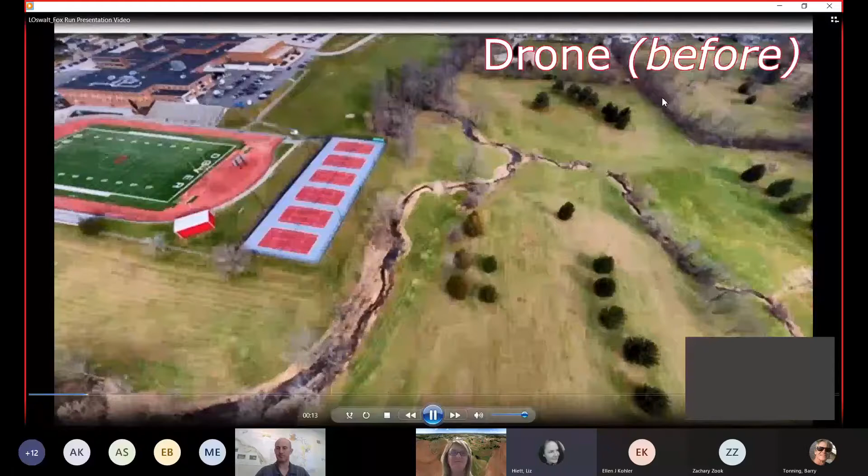The Fox Run floodplain restoration sits at the heart of Dover Township's new Eagle View Park and delivers a host of regional benefits. Floodplain restoration is a multifunctional best management practice that can provide stormwater management for proposed development, pollutant load reductions for MS4 obligations, flood mitigation, educational and recreational opportunities, and extensive ecological uplift.

The property, a former golf course, was purchased by the township in 2011 with visions for a future park. The two tributaries to Fox Run flowing through the property were identified as a potential restoration project in York County's Regional Pollutant Reduction Plan in 2017 because of the severely degraded condition.

Understanding the community's goal for a future park, Dover contracted Land Studies in 2017 to conduct a feasibility study and assess the potential to achieve both pollutant load reductions and meet stormwater needs for the park through a single floodplain restoration project. Land Studies ultimately provided design, permitting, grant writing, and construction management services to achieve regulatory authorization, secure funding, and construct the restoration, which was completed in October 2020.

The restoration resulted in the removal of 27,000 cubic yards of legacy sediments from the floodplain to restore the historical ecological function and capitalize on the associated benefits. The restoration provides sediment load reductions of 154,387 pounds per year by eliminating problematic erosion and encouraging beneficial ecological processes.

The project also meets stormwater peak rate and volume requirements associated with up to 10 acres of impervious development associated with Eagle View Park, and was also demonstrated to replace the function of an existing regional basin on the adjacent parcel, which will now be removed to accommodate a future road extension and associated economic development.

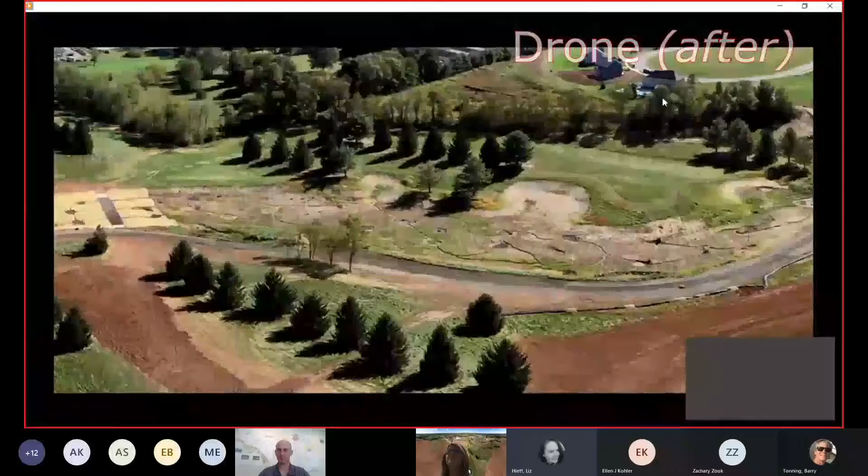Utilizing a single best management practice to serve multiple purposes helped the township to save money compared to traditional best management practices. And leveraging the extensive benefits to attract diverse funding sources helped to truly minimize costs to the township. Dover was awarded $1.49 million from DEP's Growing Greener for floodplain construction. The York County Stormwater Consortium contributed $605,000 to relocate an existing sewer line to accommodate the improvements.

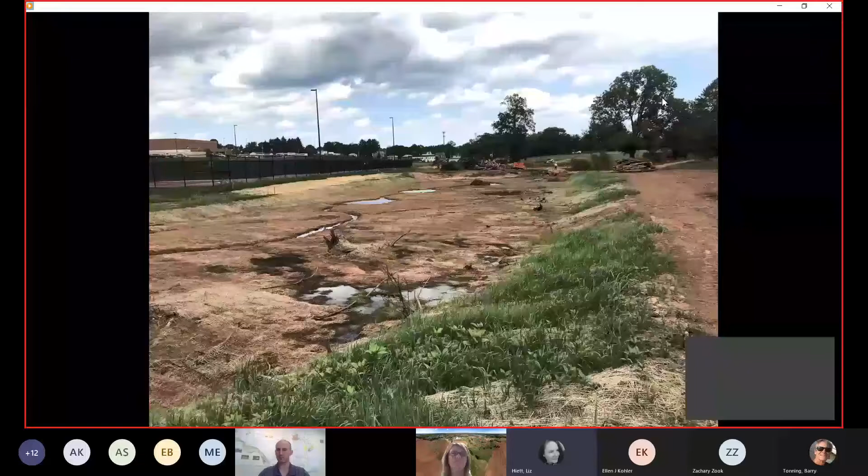And just recently, the township received $250,000 to fund the first phase of park improvements. The floodplain restoration was completed in fall of 2020, and park improvements are scheduled to commence in summer 2021. Dover's long-term planning and regional outlook were critical to achieving these successes, and those are the keys to applying these same concepts in any community.

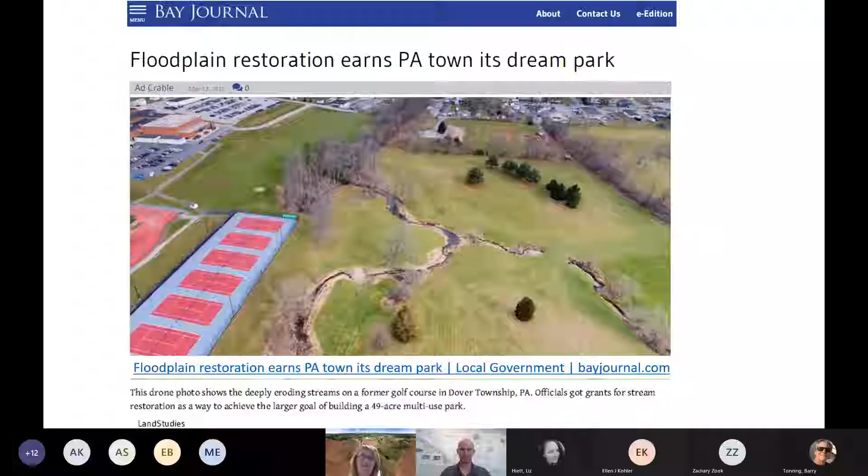In 2011, the township purchased the Mid-Atlantic Golf Course to provide for future open space and expansion of the municipal complex. However, after this purchase began, we began to see a slowdown in residential development, as well as a change in our elected official makeup. From 2011 to 2016, the entire 5-member board of supervisors changed. The staff needed to build relationships with the newly elected officials to explain the operational needs of the community and its personnel as we continue to grow in population. Fortunately, during that time, development also began to pick back up, and projects unlikely to be funded by grants became more palatable.

In 2016, the York County Regional Stormwater Consortium, made up of about 40 municipalities, was looking for projects to meet the new pollution reduction program requirements of the regional municipal separate storm sewer system permit. From 2018 to 2023, the permit will require projects to be funded to meet these pollution reduction goals. Dover Township, due to the funding model adopted by the consortium, would pay $202,000 per year to fund these projects, which equates to about $1 million over a 5-year permit cycle. The Fox Run floodplain restoration project would allow the township to see a return of those monies to the community by funding a much needed project.

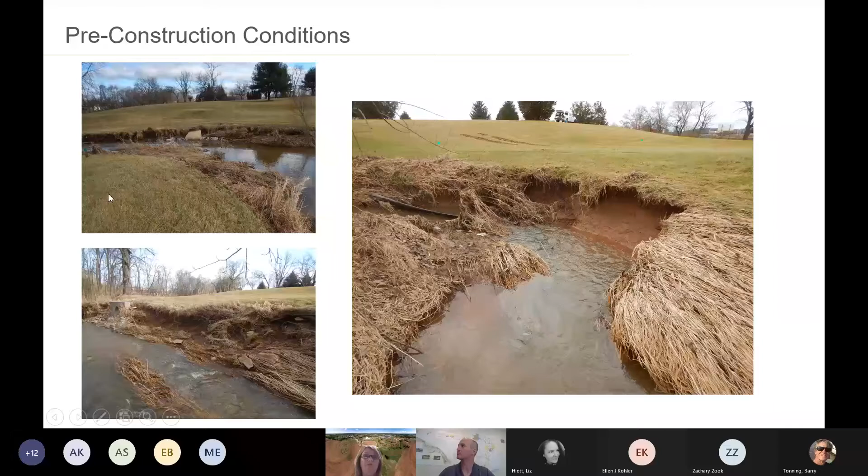Our project kicked off with the construction beginning in May of 2020 and finishing the earthwork in late September. Planting and seeding continued in the fall. Considering the circumstances that we all faced in 2020, this project was a pleasant surprise for how well the contractor and consultant were able to meet the timelines and complete the work within budget. Next slide.

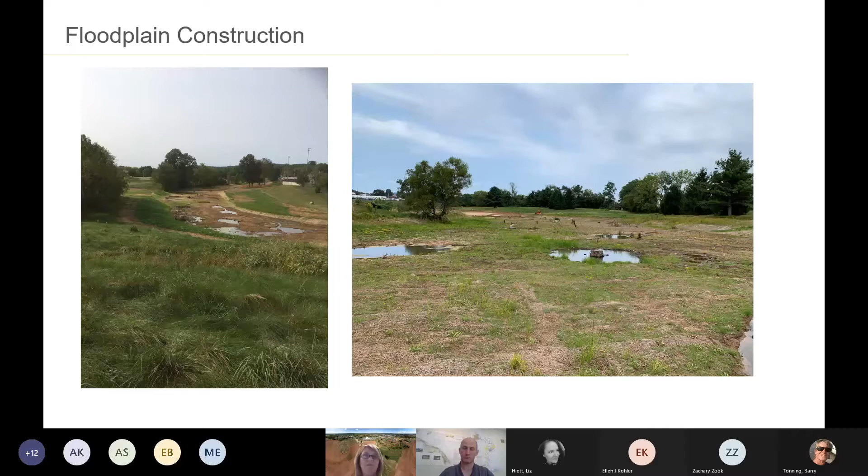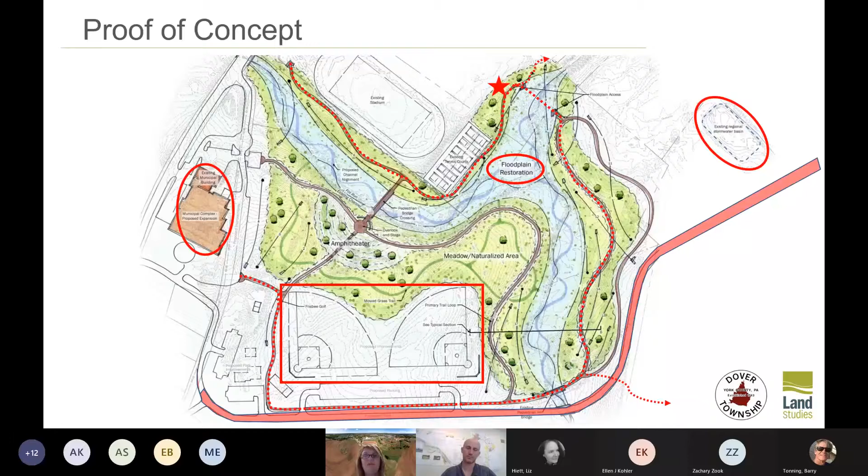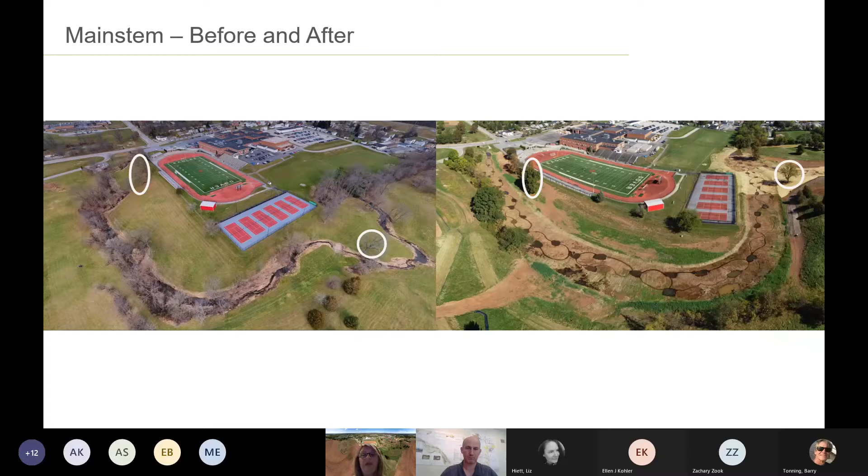The commitment of that $185,000 for design and permits and to the design build process made us successful at obtaining the Growing Greener grant for the floodplain restoration, and it was the catalyst for all other funding. Thus far, Dover Township has leveraged the $1.49 million in DEP money to obtain $250,000 in DCNR money for phase 1 park improvements consisting of trail installation, an outdoor classroom, disc golf, educational signage, and a pavilion with a fireplace.

The $605,000 from the York County Stormwater Consortium to relocate our sewer main out of the historic floodplain footprint was also received. And just recently, we received word that we are receiving a $200,000 grant from the Pennsylvania Department of Community and Economic Development from their Greenways Trails and Recreation program to fund additional trails and the pedestrian bridges. We have recently submitted for another $250,000 DCNR grant for our adult baseball field, trails, and parking facilities.

Wait, go back a minute there. On the slide on your right, between the 2 trees, that is where the pedestrian bridges will connect the school and the township's park, and there will also be educational opportunities for the students in that area for them to do their stream studies, which they've historically been doing for years, but this is going to be a much better way for them to do that work.

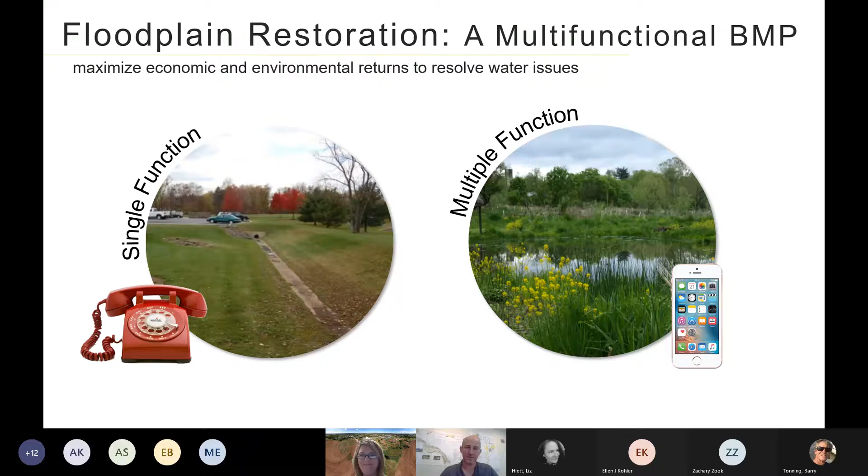Thanks, Laurel. Messing with my mouse here, going a little slowly with the wheel, so excuse me if the slides jump around.

But that was a big picture summary of Dover's journey. Initially they acquired this property with thoughts of maybe it's a future park. They had some hesitancy from the board of what we're going to do with it, and eventually the stream on the site was identified for a PRP project, which through our feasibility study we identified, yes, you're able to achieve substantial pollutant load reductions from this floodplain restoration BMP. And that's the primary driver of this project, the initial driver for the township, and kind of everyone's goal here today. How do we meet our MS4 requirements? What's the best way to go about getting these pollutant load reductions we need for our PRP?

And there's no magic bullet, but I will say that the floodplain restoration BMP is capable of achieving substantial load reductions, which we'll get into later. And as you can see from Laurel's talk, there are a host of secondary benefits that it can provide for a community. So it makes sense in a lot of cases, but it all starts with looking at the big picture and seeing what your community needs are, not just in terms of how many pounds do we need to reduce of sediment, suspended solids, but we have this requirement we need to meet, and how can we make that work within the other goals and the growth of our community, I think is the biggest takeaway.

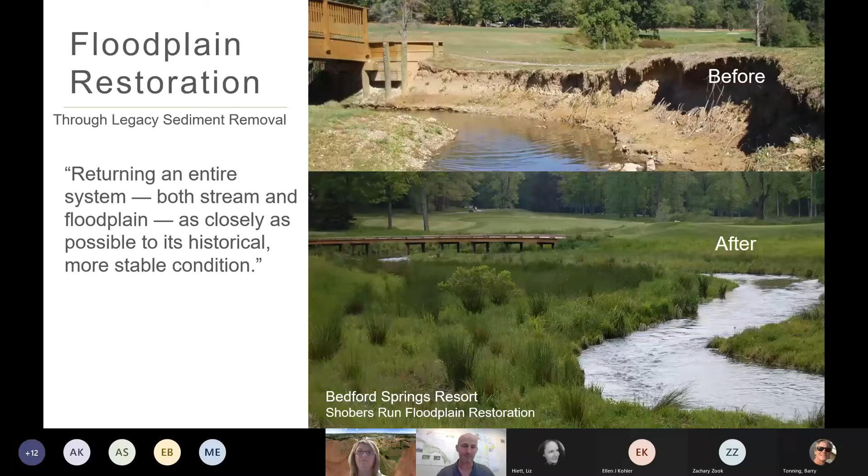And what legacy sediments are: fine sediments that were mobilized from historic intensive land uses and ended up in our valleys, that clogged our waterways that used to be these vast, wide floodplains with small anabranching channels connecting these big wetland complexes, where there wasn't any clearly defined entrenched channel, but instead a big wetland stream floodplain complex where in storm events, any sort of rainfall event, that floodplain would be full and mitigating stormwater flows and reducing energy and allowing pollutants to fall out on the site. And that's historically how our floodplains functioned up until some of our impacts from settlement.

So to understand the story of legacy sediments, you have to understand the story of the region and of Pennsylvania in particular. So when the state was first colonized, almost immediately land clearing through slash and burn timbering started and occurred across the state. The whole state was cleared of its trees, and they were an economic resource. The wood from Pennsylvania helped build the country. And it was also a way to clear land for agricultural pursuits.

So in Pennsylvania, we have a really storied history of using our natural resources as best possible and as efficiently possible to get the most value out of them when they're valuable. And 300 years ago, this was harvesting our timber and turning that land into valuable agriculture. But what this resulted in is this mass mobilization of upland sediments and fine material. So you don't have vegetation slowing runoff, so you have increased runoff events, and all this material is mobilizing from the hill slopes down into our valleys.

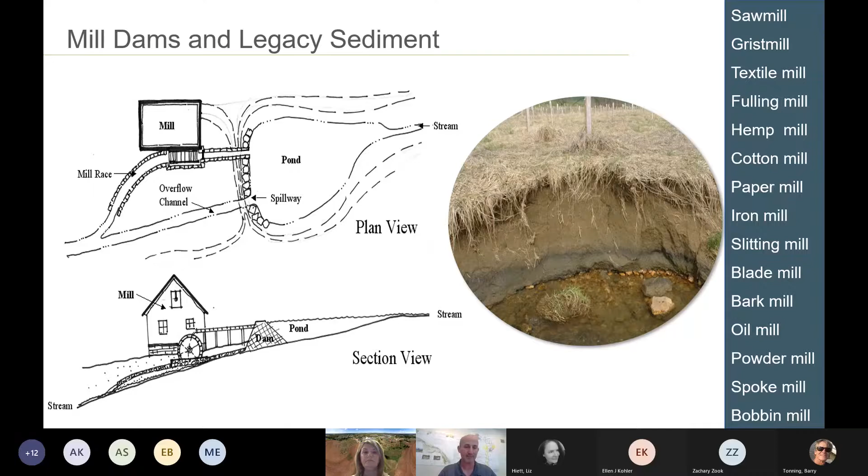So since the start of the Holocene, since the end of the last ice age, essentially, that thin organic layer was stable enough and sufficient enough to accommodate any flood flows that would have occurred without aggrading or degrading past that 6 to 8 inch layer. And then research that's come out of F&M, Dr. Walter and Merritts have been real pioneers in the study of legacy sediments within the region, have done carbon dating that'll show this organic layer can be anywhere from 400 to 6,000 years old, say. And if you do a carbon dating profile of that legacy sediment material, it's all deposited within the last 300 years or so, since whenever a dam was constructed in that area. And what happens with these dams is, when you think of a mill dam, you think of something massive and structural.

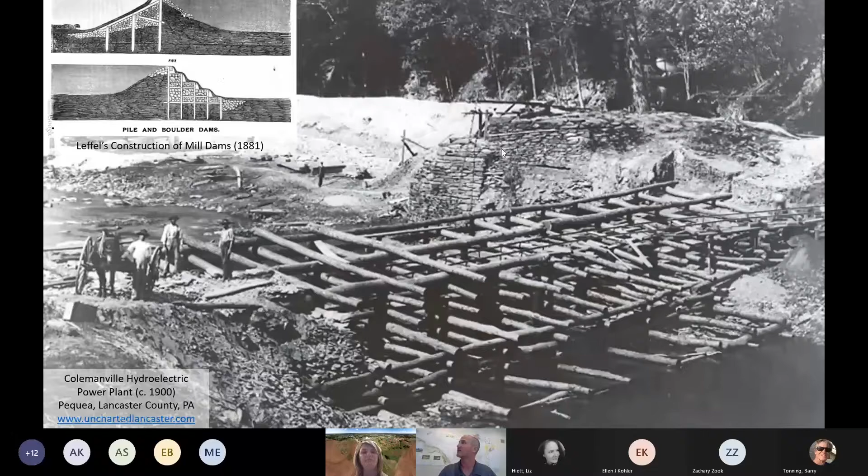And this is an extreme example. That was for a hydroelectric dam actually built in the 1900s that failed 26 years later. And you can see the remnant legacy sediments after just that short time. But it wasn't always a massive structure. It wasn't just milling operations turning a water wheel. It was watering operations for agriculture and livestock.

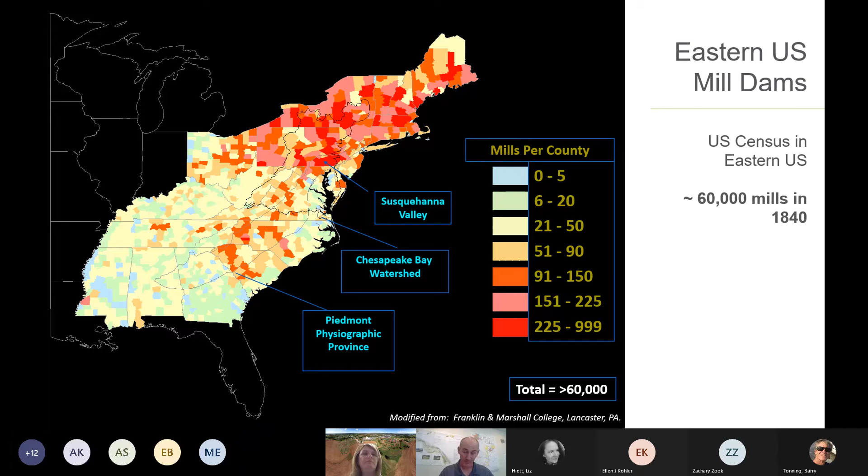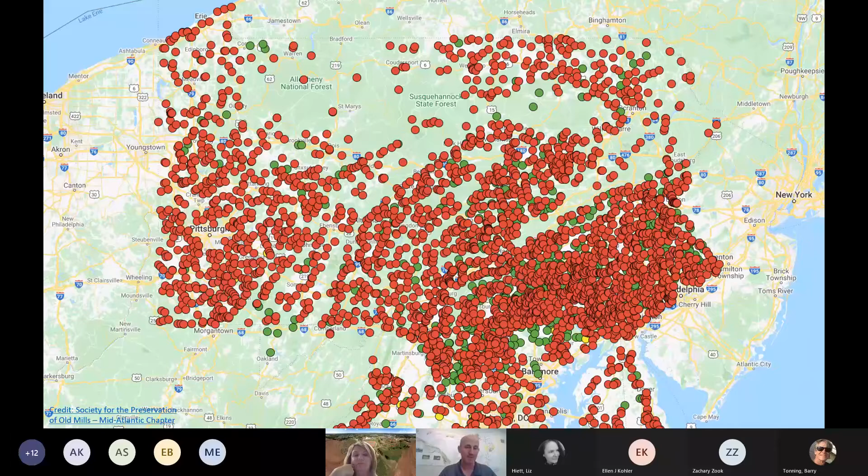So it was truly a prevalent condition, and it's seen throughout our streams. And this is what a lot of our streams look like today, whether it's in a forested reach or in an agricultural area with fewer trees on the banks. You see this entrenched condition where once those mill dams fail or are removed or not used anymore, there's an immediate drop in vertical grade control, and because they're these loose fine sediments with no stabilization, your base level control drops out and the stream incises through whatever legacy sediments have occurred there.

And more research is showing that our pollutant loading is not necessarily a function of the new development up the street not having proper E&S controls, or additional runoff from new impervious area, or improper agricultural BMPs. All of those things are an issue, but one of the biggest, and perhaps the biggest contributor in the Susquehanna Valley, is stream bank erosion. And it's not necessarily from not having enough trees along the stream bank always. It's these impacts from intensive historical land practices that no one person or group caused, but that we're all faced with dealing with the consequences of.

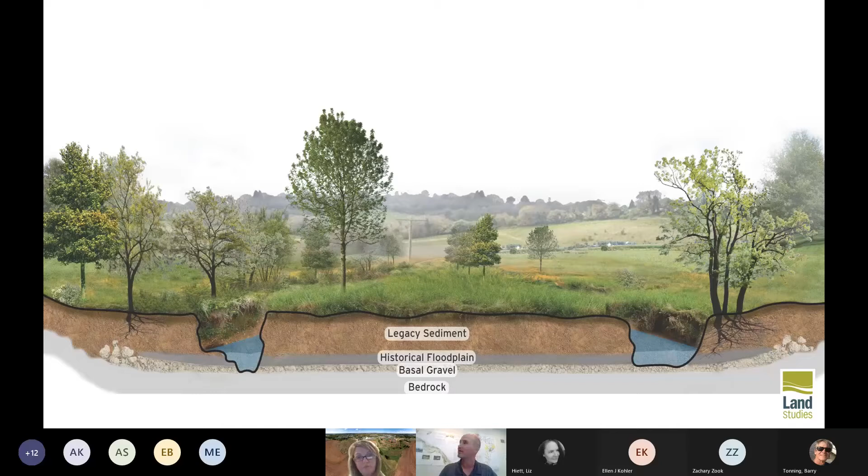This next slide shows what our historical valleys would have looked like prior to these impairments getting filled with legacy sediment. So you'd have a wide flat floodplain that would have been a massive wetland complex, and there would be multiple channels that are able to move and meander naturally like a stream is supposed to, without causing severe lateral migration, erosion, and bank failure, or running into flooding issues. And if you look at the two next to each other, you can kind of get an idea of what's going on with these systems.

So this basal gravel layer is rock material that deposited through colluvial processes at the end of the last ice age and formed the basis for these valleys. And eventually, a thin layer of vegetation became established on top of this, and they served as a stable basis for our floodplains. And then once these legacy sediments became introduced, and you fast forward to today where there's dam failure and incision, these streams will either degrade back to a stable base level control.

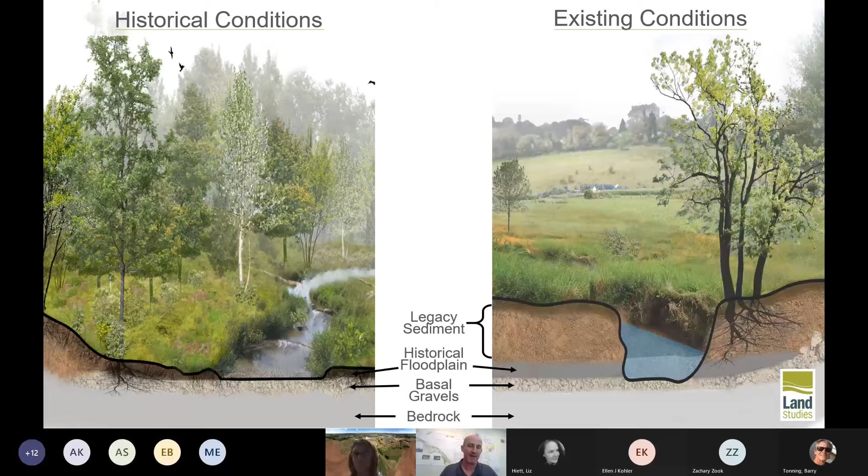In some cases, that's a basal gravel layer, but in some cases, since it's such a confined channel, it's really almost pipe conveyance in these deeply incised systems. So you can get increased velocities that'll even punch through that basal gravel layer and weather into bedrock. And then you have a true disconnection of your hydrology sources. So traditionally, there is extensive groundwater held in these basal gravels. And when you have a legacy sediment impairment like this, it limits the amount of interaction between the stream and those gravel layers. And you don't have the same energy dissipation or anything. And all these legacy sediments were present on Dover's site.

So we actually found this historical USDA aerial mapping that shows the apparent historical dam, and you can see the mill race coming through. And this was Quickles Mill. It was several mills throughout its history that would have impaired and impacted the whole site. And we found between 3 to 6 feet of legacy sediment across the site, depending on where you were at the downstream extents or further upstream in the watershed.

To give you an example of the ecological impact, these hydric soils are an existing wetland that were on site. Here's our legacy sediment layer, and here's groundwater pouring out of the basal gravel layer at the historic floodplain footprint. So you have wetlands that are highly impaired and only fed by overland flow that could be connected to that floodplain hydrology. And you can see those wetlands in the pre-construction condition versus today when they're well connected to the stream and floodplain system. This whole area is wetland right now. So we've created almost 5 acres of wetland within that footprint.

So that's what floodplain restoration is intended to address and what legacy sediments are. But now I want to talk about why it's valuable and what it did for Dover and what are some of the benefits in general. Here

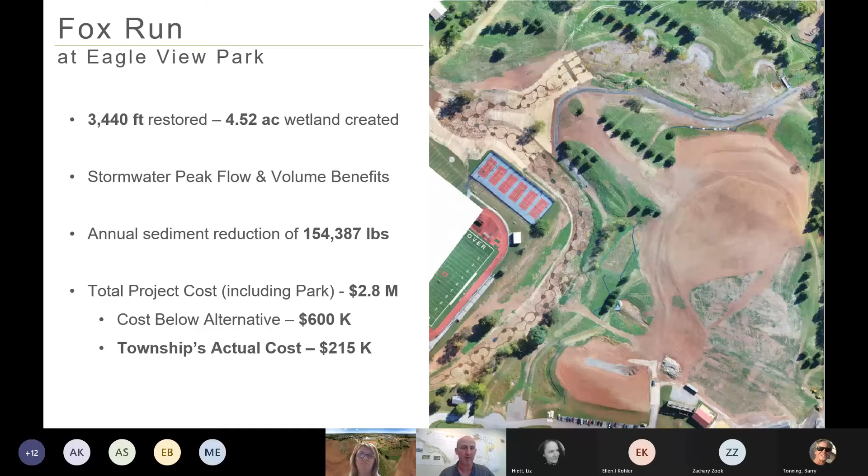So I'll jump into some of the more detail-oriented aspects of the benefits. The pollution reduction was 154,000 pounds a year. That's 77 tons per year of sediment reduction. And that's one of the unique things about floodplain restoration, where you're looking at it in terms of tons, not pounds. This single project hit 71% of all the township's load reductions for their identified projects. Now, the average project identified in the regional PRP for Dover was about $11.50 per pound. When you do the math for the floodplain, it comes out at $11 per pound.

So you say, what's the big deal? There's not much difference, but you've got to remember that floodplain restoration costs included bridge abutments for this new trail system. We also incorporated removal and disposal of additional fill left over from their municipal project, detail grading for the park, trails, and a lot of ornamental upland landscaping that didn't necessarily contribute to their PRP. So when you look at it like that, the actual restoration cost was $6 a pound.

And then the PRP projects in York County go through the York County Stormwater Consortium. So Dover is one of the townships in this consortium, in this group, and they all work together to find the most valuable projects and fund the most valuable projects.

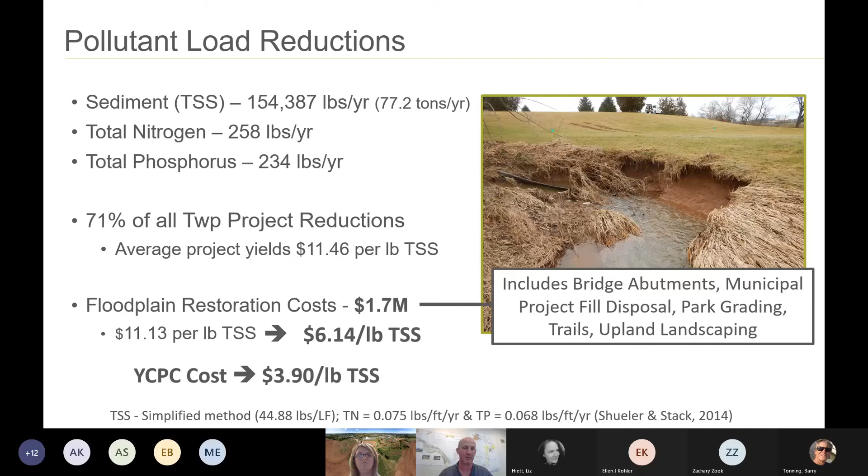Another way to look at it is, even if you can figure out other PRPs that might be cheaper on a dollar per pound basis, you also have to think of your land resource. So this is a study that was published in the Journal of Soil and Water Conservation on floodplain restoration and legacy sediment hotspots. They were looking at achieving the same pollutant loads from different PRPs. So what they could do on 100 acres of floodplain would have required 4,800 acres of forest buffer. So you have to think of your space and the amount you have for this resource to devote to these types of projects.

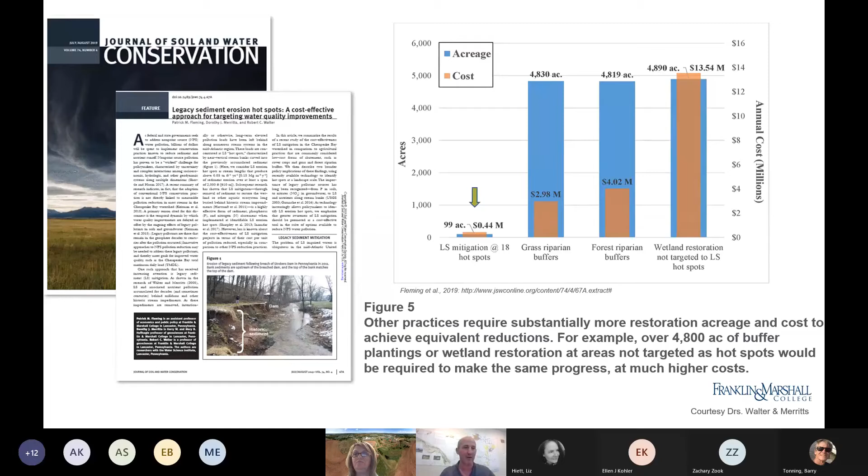Now, when I talked about pollutant load reductions for Dover's project, we were talking in terms of standard default rates that we use to quantify those load reductions to maintain consistency with the PRP. But there's new guidance coming out for Chesapeake Bay expert panel protocols that are going to allow these types of projects to demonstrate even more substantial sediment and particularly nutrient load reductions, which is going to be the focus for the next round of permit cycles, and is a focus for the county action plans that some of your counties may already be part of.

So I wanted to talk a little bit about that, and it also gives you good insight into how these processes work. So the protocols are prevented sediment, encouraging hyporheic exchange, and floodplain reconnection to allow pollutants to deposit on site. So prevented sediment is essentially addressing these deeply incised channels that are vertical bare banks that are also conduits to allow for increased flow velocities. So when you remove that legacy sediment, you're eliminating the erosive condition by creating a flat, well-vegetated floodplain, and you're also dissipating all that erosive energy.

So think of these legacy impaired systems like a blocked artery, essentially, where when that gets choked in, blood flow increases, velocities increase, and problems happen. It's the same thing that happens in these systems.

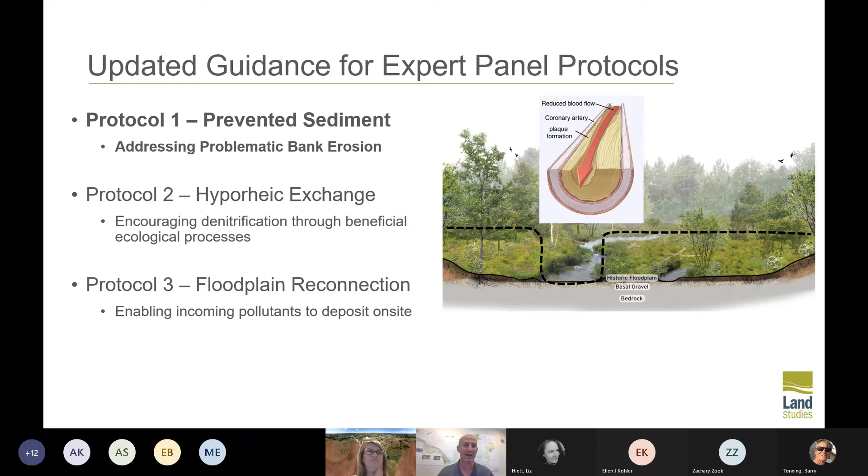The second protocol is hyporheic exchange, which is flow between groundwater and surface water. When you're doing that with floodplain restoration, you're tapping into this groundwater in the basal gravel layer, and that basal gravel layer is full of interstitial space that allows for beneficial microbial colonies, environments, and processes to take place; it's essentially encouraging denitrification. And if any of you have a wastewater background, the process is actually very similar in concept to a trickling filter, where you are dispersing effluent across a highly porous media where water slowly percolates and a biological film develops that processes pollutants. And our waterways historically did the same thing.

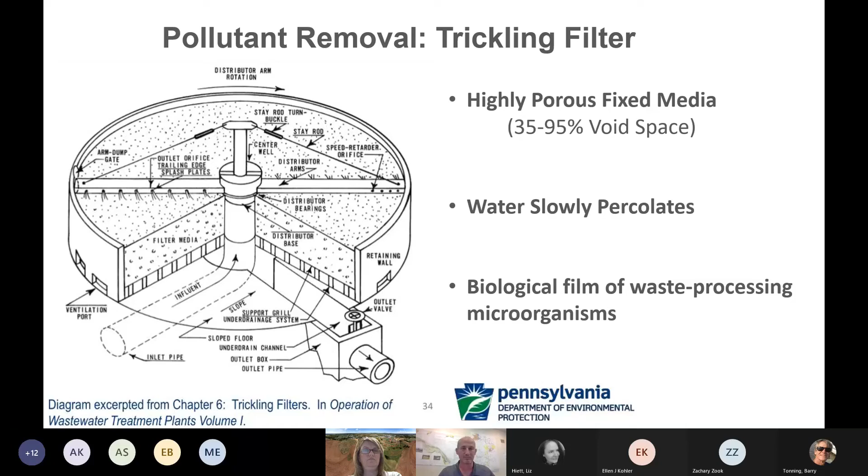Got just a couple more minutes, Reed. Okay, I can jump through here.

And the third protocol is floodplain reconnection, where you are making the stream sit in close proximity so increased flow events can dissipate across that footprint, dissipating energy and allowing water to fall out on site. So this transitions nicely to the stormwater benefits of floodplain restoration. So when you have that increased footprint, you can achieve really substantial peak rate reductions and volume attenuation.

So this is transducer data from one of our other restorations measuring incoming flows to Brubaker Run floodplain restoration in orange and outgoing flows downstream in black. And you see it's over cutting the peak rate in half. And this is something you can use to quantify for your Chapter 102 stormwater requirements associated with development.

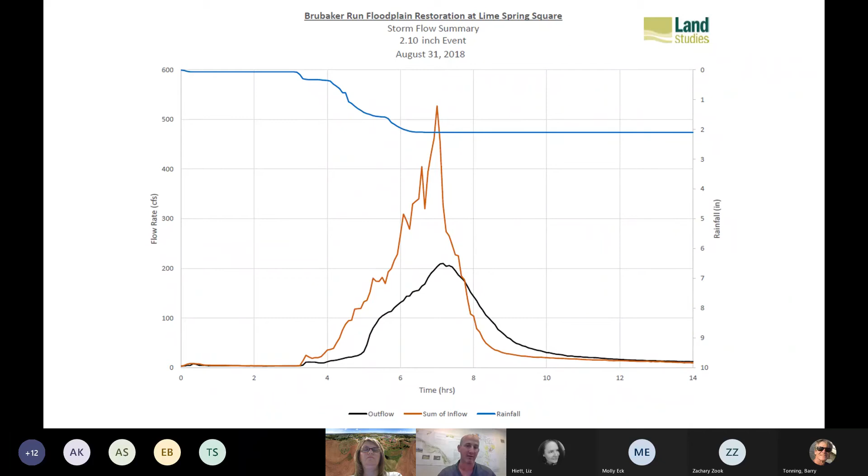But it also gives you a really good idea of the flood mitigation potential, and it's going to be a big deal, and there's a lot of money out there in Pennsylvania. Flooding is a huge deal. Once you get to anything bigger than, say, a 1 or 2 square mile system, and big systems, you can't address and mitigate flooding through volume attenuation. You need to address the peak rate and lower the peak rate. And restoring your floodplains is a great way to do that. So floodplain restoration is a recognized and one of the less understood and most ignored stormwater BMPs in the manual.

These are the reductions that we were able to demonstrate using two-dimensional HEC-RAS modeling, where we build a post-construction hydrograph, run it through the proposed floodplain corridor, and are able to quantify those peak rate reductions.

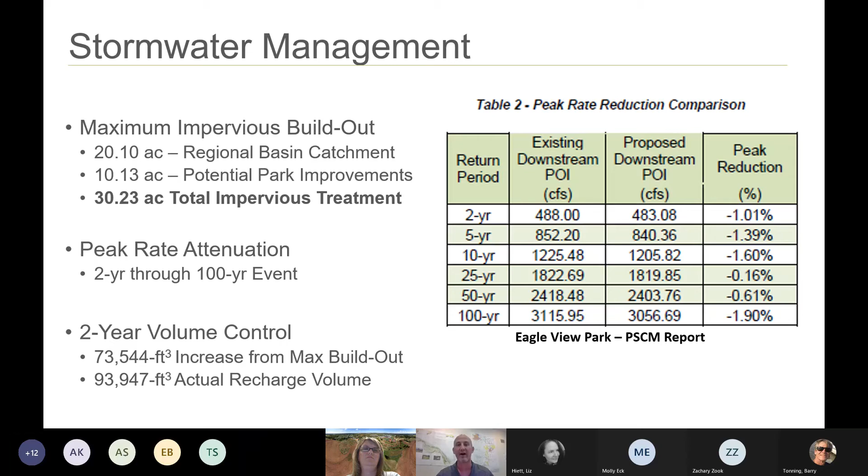So just to jump back to all the benefits that the township was able to get from this project, they used the floodplain restoration as a stormwater and pollutant reduction BMP. It enabled them to remove this regional basin that's going to add 1.5 acres of commercial development for this landowner, which when you're increasing your density like that, you're increasing your tax basis.

Being able to work with the regional developer also enabled them to build this road, which is going to be used for bus transport to and from the school. So right now, the only way to the intermediate school is through one of the two primary roads in the community. If there's an accident or something, the whole school drop-off system is out of touch. So it goes back to this concept of building resiliency, where being able to build this road is going to accommodate emergency traffic and school traffic around the current square in town that they're all relying on.

The legacy sediments were used to develop and build up this park pad. So they have a very hilly site that had maybe 2 acres of buildable space, and we were able to create a 10-acre park pad. So there's just a lot of benefits they got.

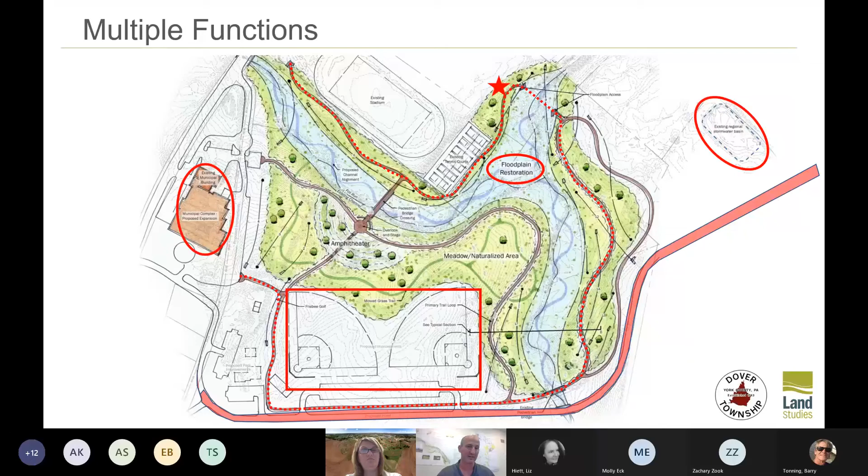And when you look at the dollars and cents, they're saving $600,000 compared to the alternative cost, and they're able to leverage their investment and their goals to reach out to these diverse funding sources that are also getting benefit from it. So if you're meeting your PRP requirement, you might still be able to get funding from NFWF, who's not necessarily looking to fund a PRP requirement, but is looking to fund wetland creation and ecological uplift.

Or you might be able to leverage that fund like the township did for DCNR recreational grants, and really start to stack benefits and leverage benefits to do something that's economically feasible and can vastly out-achieve any individual alternative BMP that you'd have to look at. So that's everything we have for you.

I just want everyone to take away from this that floodplain restoration is a community planning tool, and it's just one of the tools. But when you're thinking about these systems and looking at these systems, think about the big picture for your region. So with floodplain restoration, you can achieve pollutant reductions and stormwater management, but also when you're able to do mass load reduction with a single project, you're making it so much easier to maintain.

You don't have 50 rain gardens you have to run around and check on after every stormwater event. You have one natural system that after the vegetation is established is essentially no maintenance. It's a natural system that's self-maintaining. In Dover's case, they have a lot of educational and recreational benefits because it's at the center of this park and it's connected to the school system. It's creating these pedestrian safe routes to school.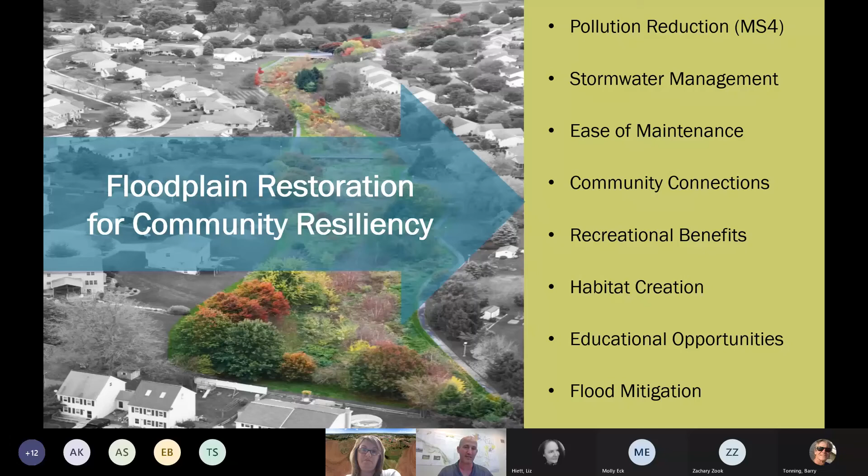And in a lot of cases, this wasn't a focus of the project in Dover, but flood mitigation, being able to reduce that peak rate, spending a penny of prevention to eliminate the potential for a pound of flood recovery is a huge deal.